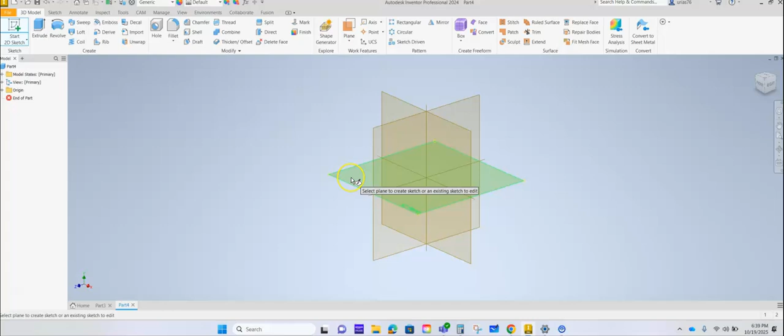All right, and this is the part. So from home, if you created an assignment 1.3.4, make sure you're in there. All the other ones don't really matter, just go ahead and start. What does matter is that you make sure you're on an inch file, okay? So we're going to go part, we're going to start, and we want to be on this XZ plane.

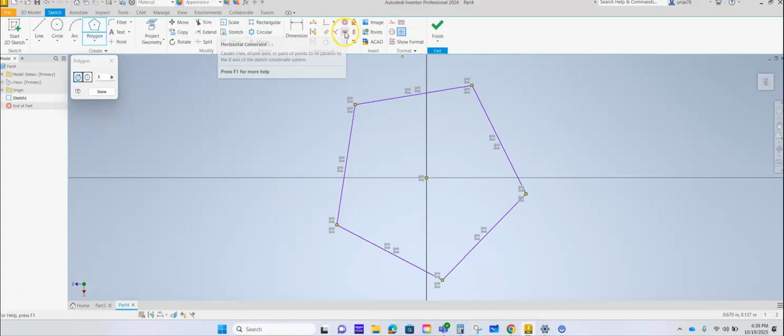Click there, let's go get our polygon tool. We need 5, it's a pentagon. And we're going to start right here in the center, click and drag up, about like so. Then we're going to grab this horizontal constraint, and we're going to constrain the top to the midpoint right there.

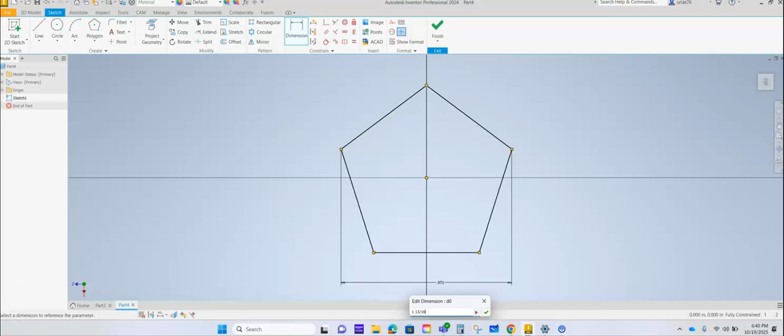Okay, then you can see we still need 1 dimension right here, so let's get that dimension. So from here to here, which is the wide part right there, we said that that is 1 and 13 sixteenths. Okay, and there we have it, which is also, if we do the math on that, 1.8125. Okay, there it is.

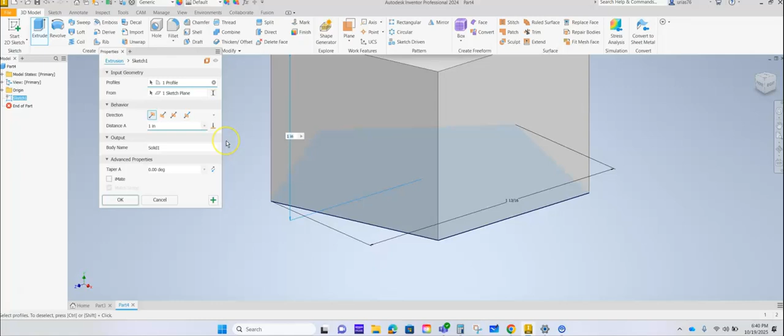Let's go ahead and finish that sketch. We're going to extrude what? Just, whoops sorry, that's 0.0625, about 1/16 of an inch. And then that taper that it was giving us was a negative 45. Okay, you can see that there's that taper in. Let's go ahead and click OK.

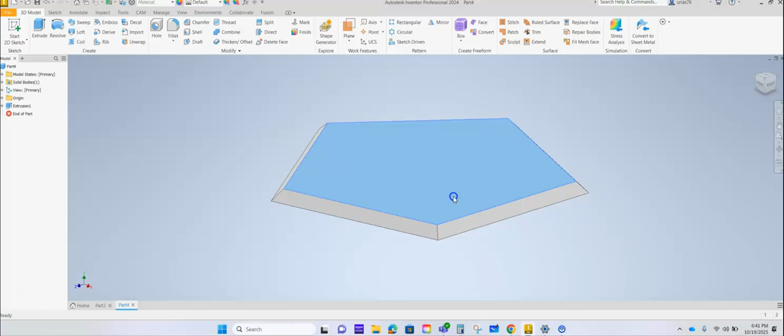Now we have to click on this face and do a new sketch. Zoom out a little bit. We're going to project geometry. When you come to this, make sure that the whole pentagon is selected here. You see that? You can do individual lines, if you watch people sometimes they'll do that, but guys this is a lot faster. Just click here, okay there that is. That's done, finish your sketch.

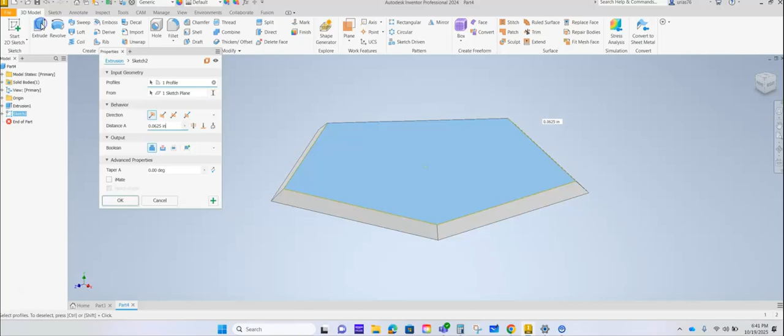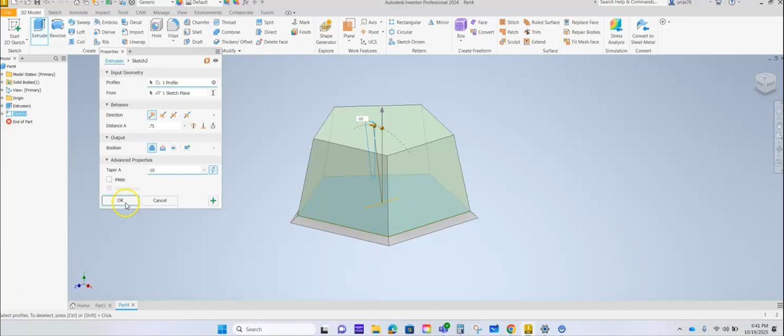We're going to extrude that. Okay, what, to 0.75, up. Okay, zoom out. And this is supposed to be a 10 degree, so we're going to type in negative 10. How do we know it's negative 10? Because we want it to go in, not out. If we wanted it to go outwards, then it would be a positive 10 degrees. Okay, so we'll click OK, and there that part is done.

Okay, now we're going to come up here, we're going to grab our plane, and we're going to select an offset plane. Okay, where? Right there. And how far up? We want it to be 1/8 of an inch, so 0.125. Enter.

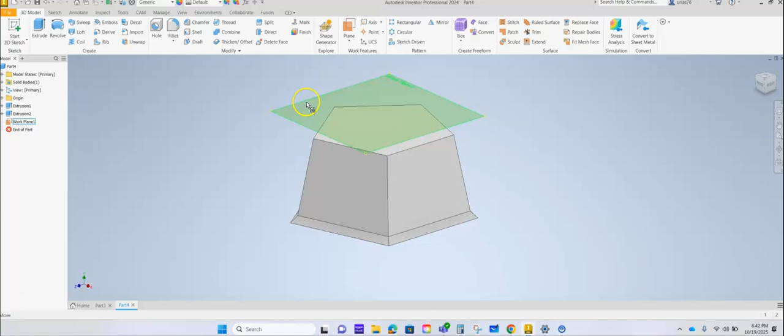Then we're going to click on this plane and create a new sketch. Okay, kaboom. The next thing we're going to do is project our geometry, but this is important, guys.

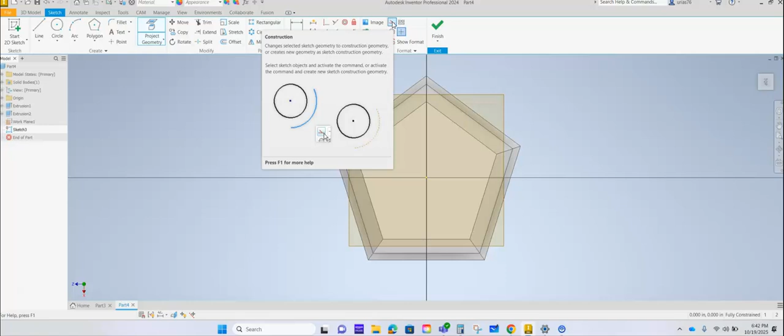I'm going to select project geometry, but then I'm going to come over here and select construction. You'll see a lot of people forget to do this, and then they have to go back and deselect all of these lines because they didn't make it a construction. They actually made it part of the part. Make sure this whole thing is highlighted. Click. You can see that's not what I want. It's solid, so I'm going to hit Control Z.

I'm going to hit that construction line, project my geometry, and click. Now I have a construction line. You can see it's a construction line all the way around. Then we're going to get our lines here and make sure construction is checked.

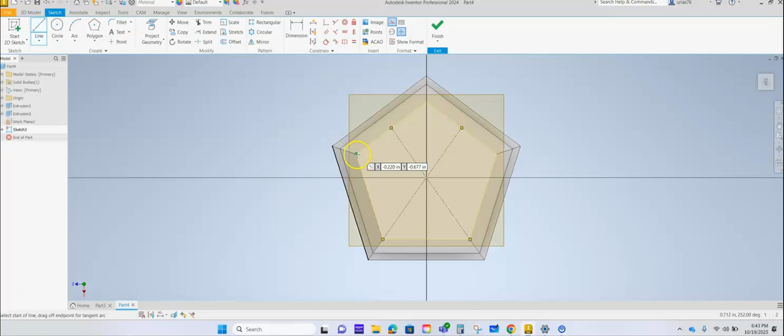We've got to go find the midpoints now. There's the midpoint. We're going to take it all the way down. What we're doing is making sure the center is what we think it is. Again, midpoint all the way down, and where all of these lines intersect will be our midpoint.

Make sure you get that green dot. That tells you you are at the center of that midpoint. Boom, we have them all, we have all of our crisscrosses. Now we're ready to make our circle.

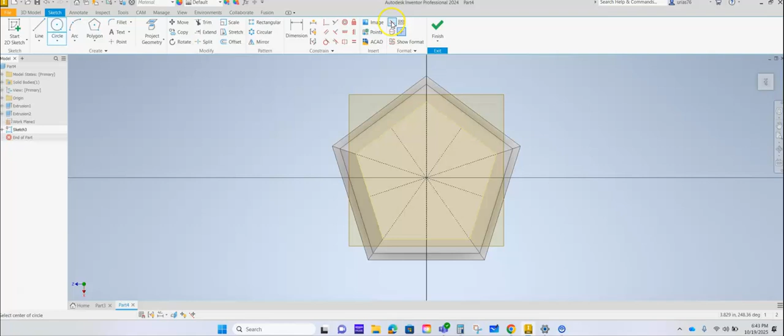So come over here, grab your circle. Uncheck the construction because I don't want this to be a construction. Make sure you start right there in the center, which we are, and that is 1.1 for that circle. Okay, perfect, that is even. So we're going to go ahead and finish our sketch.

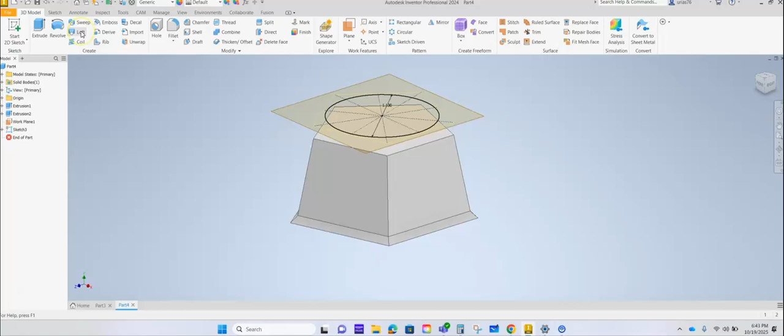And this is one of the things you guys were supposed to learn, and that is loft. So we're going to loft this thing. What is it that we're lofting? We're going to loft this circle, and then this is tricky, guys. You have to zoom in kind of here.

We're trying to get just this top. There it is, you see how I have the top selected? Oops, it's kind of tricky. That top - select it and then click OK. You can see that it lofted from the top to the bottom here, and they kind of combined each other together.

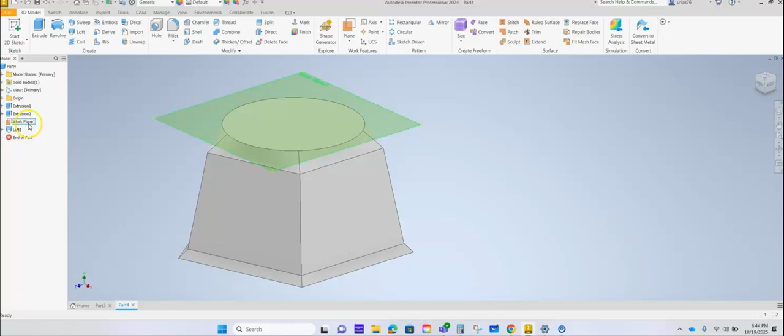Got that? Now I'm going to come up here and turn off this work plane. So I'm going to right click and go to visibility and turn that off.

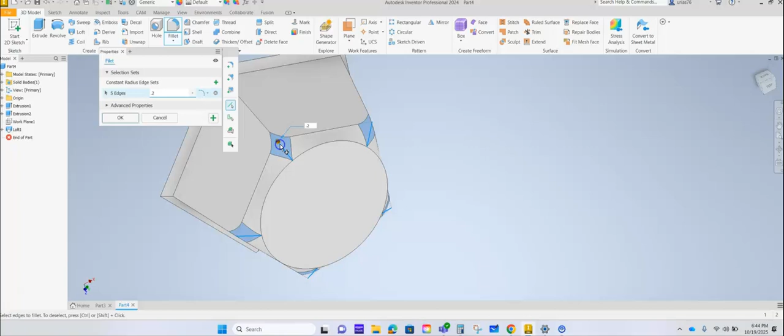Now we're going to do some fillets, and the fillet all the way around is 0.2. And that's here, here, here. Then you guys can spin around here and here. Click OK. Go back home. There it is. All right, so far so good, yeah?

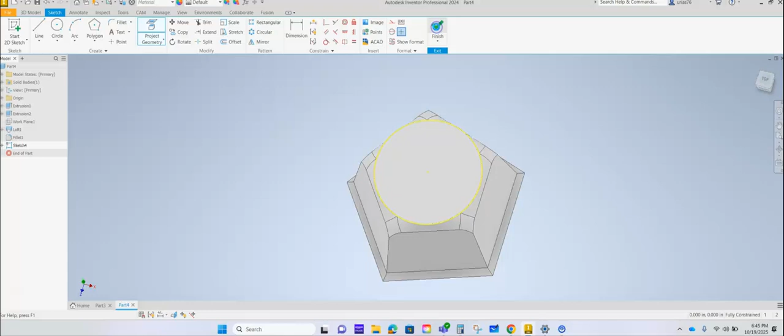The next thing is we're going to select this face. We're going to do a new sketch. We're going to project that geometry. And then we're going to extrude this up, and that's going to be just 0.5 up.

And the degree taper is going to be -2. Okay, a -2 degree taper right there.

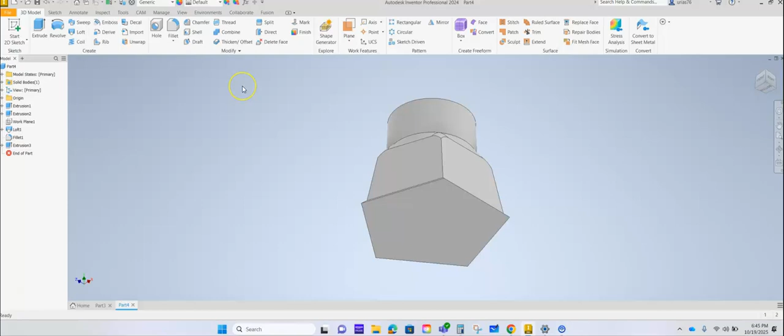Now the bottom here, I'm going to shell this, guys, but we're not actually going to complete the shell. I just want you guys to see what shell does. We'll shell it at the end, but I want you guys to do this with me.

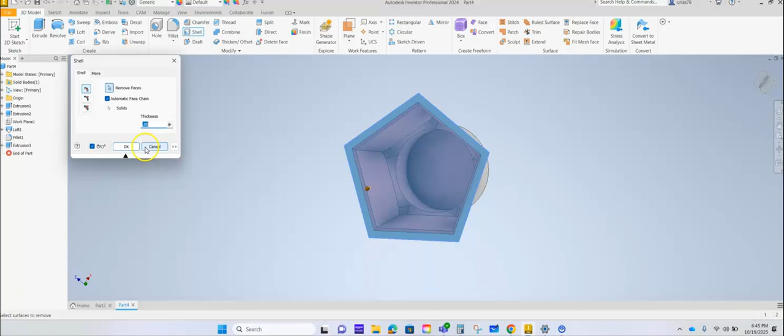The thickness is going to be 0.06, and I'm going to come up here and select it. If I zoom in here and give you guys an angle, you can see this is what they do to cut away material, to hollow it out, so that way we're not using so much material, but yet hopefully keeping the structure integrity intact. I'm just going to go ahead and cancel so you guys can kind of see what this looks like right now. Let's go ahead and hit cancel.

And then what we're going to do is we're going to select this face. We're going to do a new sketch.

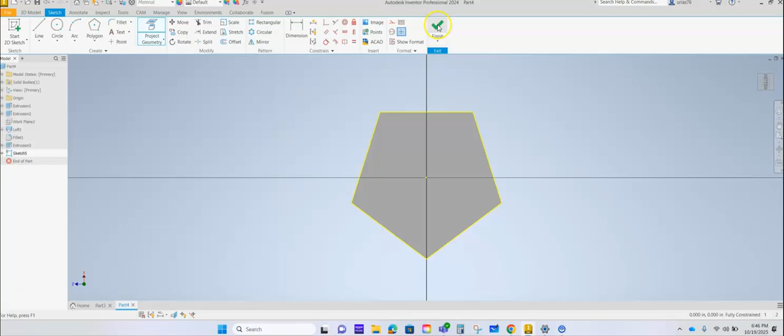Okay, we're going to project geometry. Now this is tricky, okay? Make sure that when you come, guys, you're trying to find the whole thing when it's highlighted, boom, like that. Not all those individual lines. When the whole thing is highlighted, click, boom. Or you could go around and click each outside line. I think this is a lot easier. Go ahead and finish your sketch.

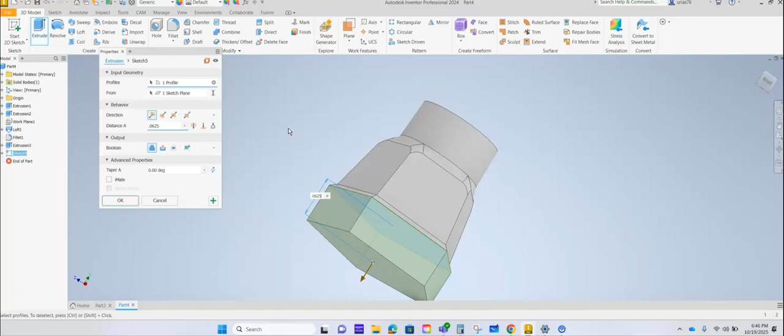I'm going to zoom this in. I'm going to extrude this, and that extrusion is going to be... I believe that one is 0.0625. And we're going to taper that at a 3-degree angle. Okay, boom. Okay, and now you can see we've got that piece done.

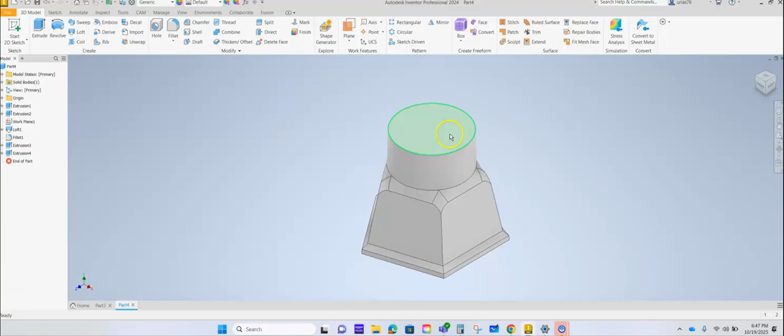All right, so we're moving here. Now we're ready to do the top half. So we're going to click on this face here. We're going to do a new sketch. We're going to do a circle right here in the center. Click and drag, that's going to be 0.25. Enter, finish your sketch. Now we're not making a hole, guys, because we need to taper this hole.

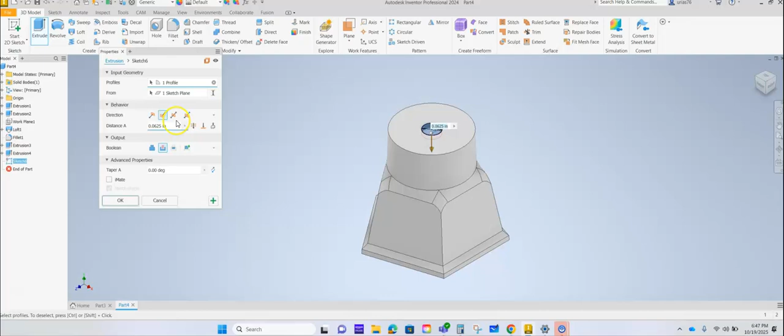Okay, so we're going to use the extrude. We're going to have it go the opposite direction. And normally we would just type in a value, but I want you guys to see this. So I can grab this arrow and I can bring it all the way down, so that way you can kind of see how far down you're going. But it's not real easy to get exact, so I'm going to go ahead and go down, and that number is going to be 1.325.

Then we have to add a taper to this, and again, we want it inward, not outward. So that's going to be a -2. Okay, and watch what happens. All right, you see how that line tapers inward? And the reason why it does that is so that way anything that you put down in the hole will hold on to it and it won't just slide out nice and easy. Okay, it'll hold on to it. So click OK, and there we have it.

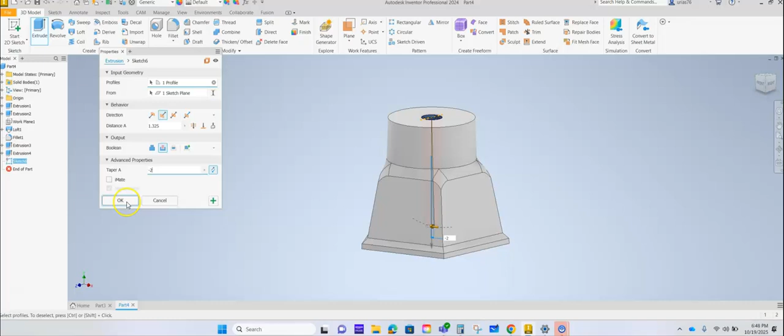Now we are going to select... oh, I forgot about a fillet here. We got to do a fillet, and this is going to be 0.0325, and we're going to do that fillet right on there. Okay, there's that fillet. There we go.

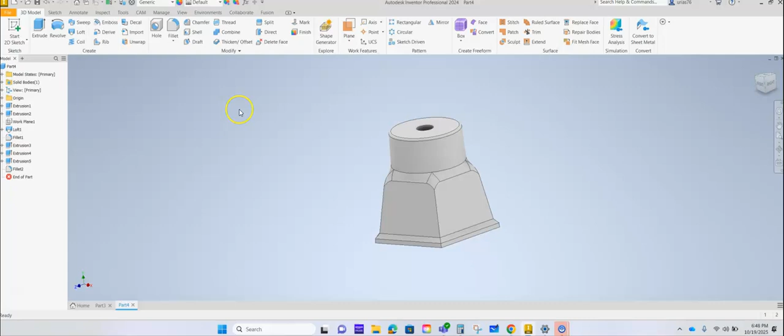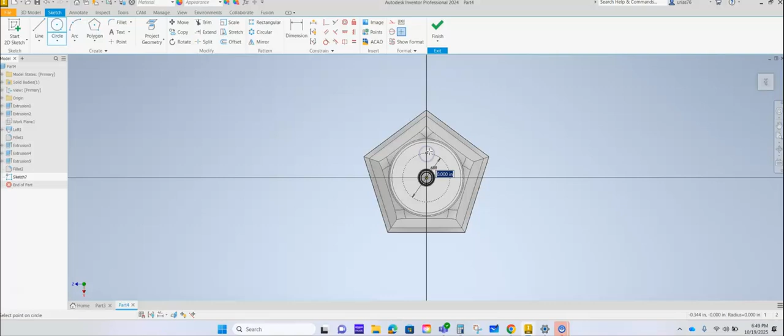And now we're going to do a new sketch on the top here, and I'm going to get a circle, and I want a construction circle here. Okay, so I'm going to grab that, make sure you start in the center, bring that up, and that's going to be 0.688. Enter, and I'm going to use that line. I'm going to uncheck construction, circle again, and I'm going to use that to make sure that I am constrained, okay, and that's going to be 0.125.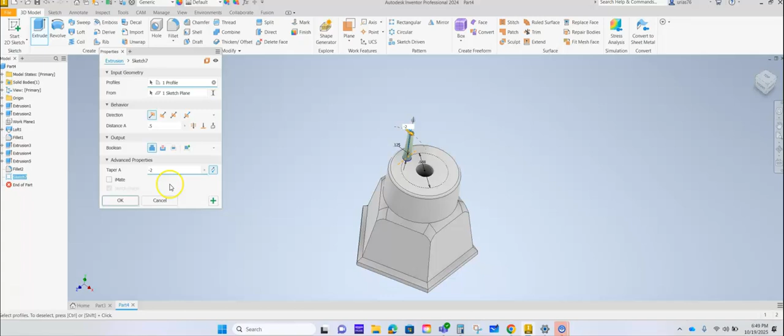Enter, finish, and I'm going to make an extrusion, and that is going to go down 0.5, and again it's going to be at a -2 degree angle. Okay, oops, wrong way. Go down, there we go. Whoops, click OK. That one's done.

Now we're going to use our circular pattern. We're going to select that feature. Right, because it's asking me what feature, so this feature. Then we're going to select the axis. What axis? That axis. How many? We need 5 of them. We're going to click OK.

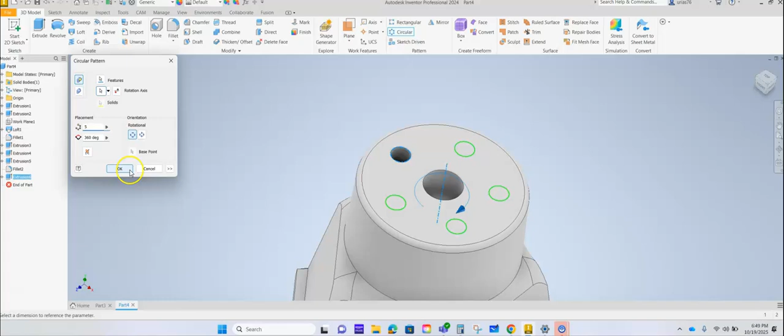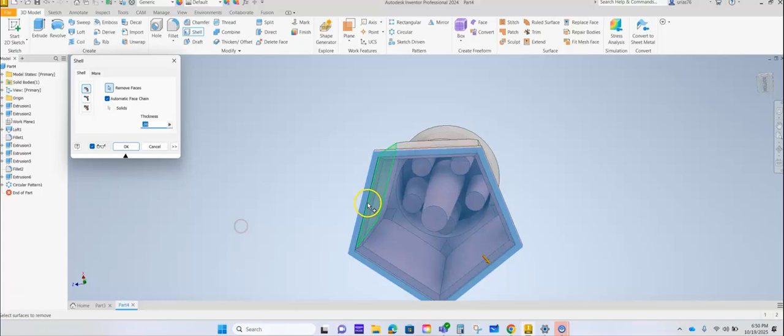And last but not least, guys, is the shell. All right, so then we're going to go up to shell. It's already has the 0.06 shell. Come over here and click, and now you can see that it's shelled. And now you guys can see that it shelled everything but the existing hole, so that way the holes still have structure, so they will hold the tools. But we hollowed it out enough to hopefully cut down on the cost of our material without doing anything to the structural integrity of this part.